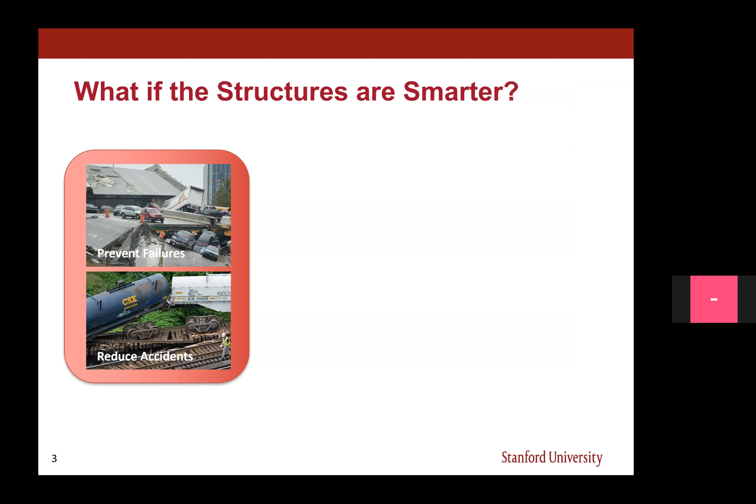So we have to think, what if these structures become smarter? By making the structure smarter, we can sense different kinds of potential failures in the structure to prevent catastrophic events and reduce accidents. So we can increase the safety of these structural systems. But in addition, by better understanding the occupants using these structures or the surrounding environment, we can provide better services like personalized care, enhanced health care for people, or security systems, or better preserve the environment around these infrastructure systems.

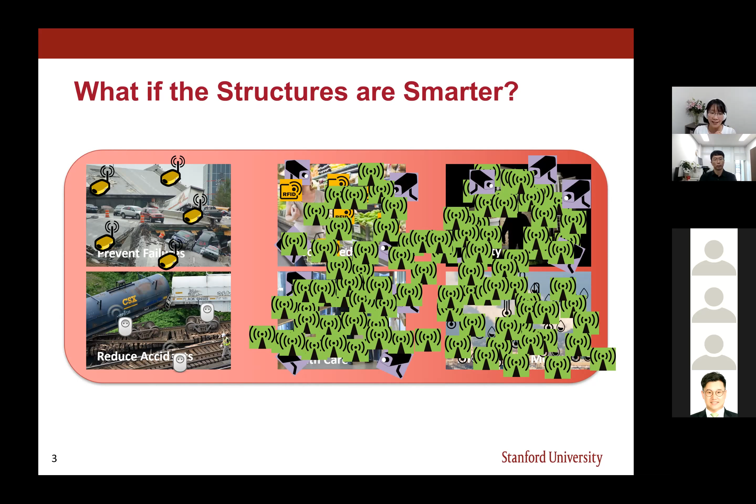So to make these structures smarter, one thing we need is the sensors to collect information about this infrastructure and people. Right? So we can put sensors on the infrastructures, or we can put cameras around to watch people, and various occupancy sensors and so on. So you see, this is what we need. Just need to have a lot of sensors to collect information. But then this sensing in the infrastructure system is actually not a very easy task. There are several reasons for it.

One thing is these structures tend to be very large in scale and also very complex. So in order to instrument all these large scale structures, the system gets pretty expensive. Another thing is the sensor life tends to be short. It's a relative thing. So do you guys know what's the typical sensor lifetime?

Anyone? So an easy example would be, think about how often you change your cell phone. Maybe 2 years. Or if you are better at maintaining your phones, maybe 5 years. But I wouldn't put more than 10 years. So that's the scale for sensors.

Then think about the infrastructures, the buildings and bridges that we're designing. They're designed to last for at least 50 years or 100 years. Sometimes they're standing out there for thousands of years. So there's a huge gap between the lifespan of these sensors and the infrastructure systems, meaning we will probably need frequent updating of the systems and the software and so on. So that will make the system even more expensive.

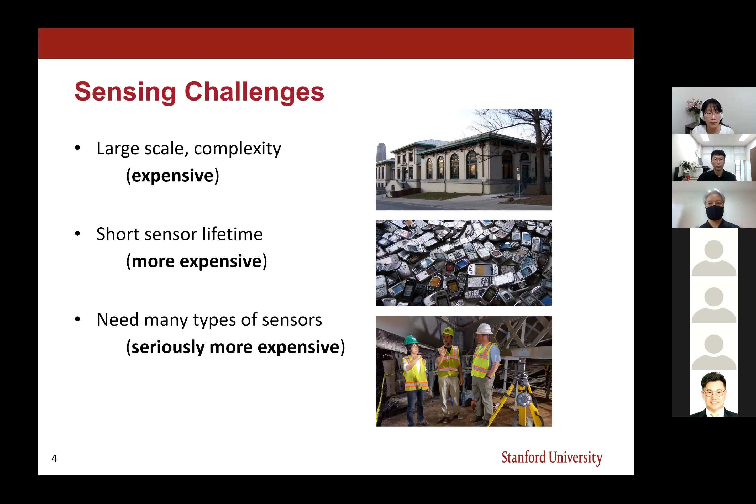And then if you want to do more complex analysis of people and environment and structure together, we need many different types of sensors, which will make the system even more expensive. So in this regard, my research group has been focusing on answering the research question of how can we sense all these things in a more maintainable and sustainable way? And as an answer to that, we proposed the idea called structures as sensors. So what it means is, let me give you an example.

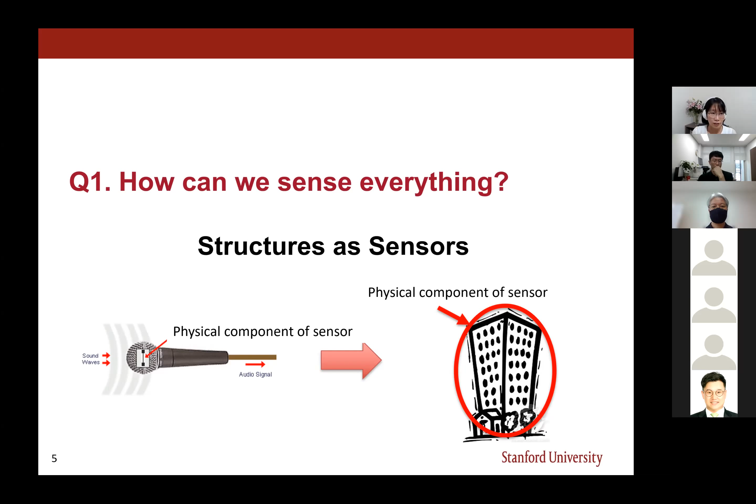So typically, if you think of sensors, the physical component of a sensor, for example in a microphone, is considered a small diaphragm inside the microphone that vibrates as the sound wave comes in. So it's responding to the input, therefore it generates the data that correspond to the incoming sound wave. But now, instead of thinking of this small diaphragm, we're going to think of this entire building structure as the physical component of the sensor that responds to the input coming from the humans and environment and the structures, so it can collect information about them.

So this idea is based on the insight that if you look at these structures, like the transportation systems or the buildings, their structural responses, like their vibrations, depend on the structural conditions themselves, like whether they're intact or if there's any damage to it. That all gets reflected in how these structures move. But they're also sensitive to any activities ongoing for the occupants that are using these structures. And also, of course, they're affected by the surrounding environmental conditions.

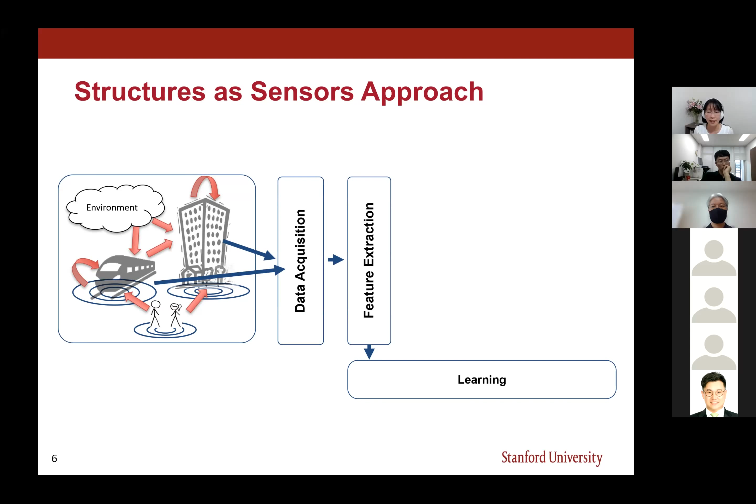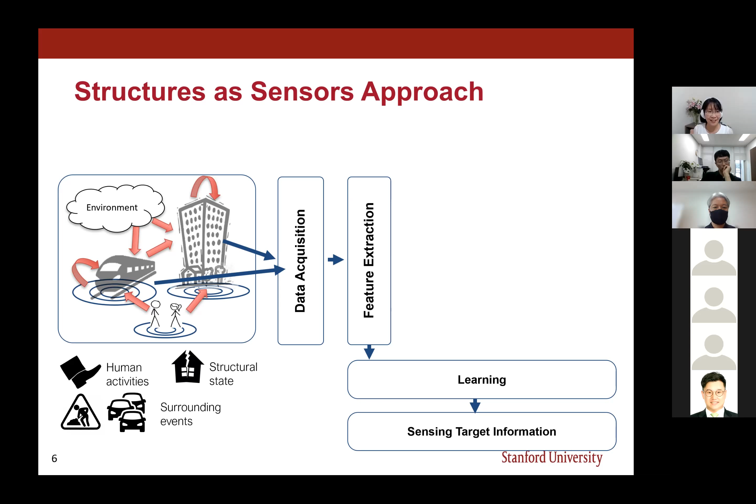So by looking at how these structures respond to all this input information, we can acquire the data from it and then extract useful features out of it, put it into the learning models, and then we can extract information about the sensing targets like human activities, structural damage, and many surrounding events around the structures. So looks like problem solved. We can use these humongous sensors to collect all this information in an easier way.

But then we found out that in order to enable this structures as sensors approach, we actually need a lot of data. That's because, as I just explained, structural responses have all this information about humans, structures and environment, which is awesome. But in order to extract the desired information that you need, you actually need to decompose all of these. All the other information that you don't need is going to become the noise, and you only want to extract the target information you want. So in order to do that, you need a lot of data samples to understand this complex mixture of multiple sources of excitation.

Another reason will be every structure is unique. Think of the buildings. Every building looks different. And even if they are designed the same way, they're constructed differently and they're also used and operated in a different way. So they become different structures over time. So in order to understand these individual structure responses, we need even more data, good data.

And then many of the interesting events that we want to detect or predict tend to happen rarely. Like structural damage, how many times do bridges collapse? A very small amount compared to all the other healthy bridges out there. Same thing, how many people get sick compared to all the healthy people out there. So in order to capture all these rare events, we need seriously more data. Okay, so it looks like we just need to use the structures as sensors approach and just collect a lot of data. Problem solved.

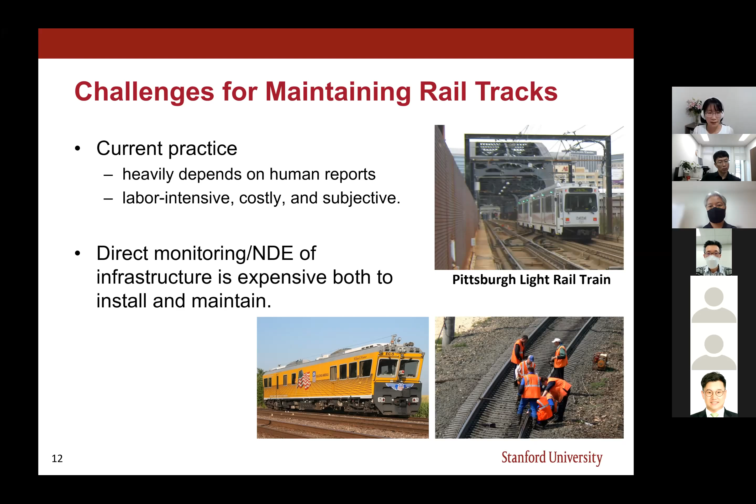So if you think about it, these regular operational trains will travel across the country using these rail tracks every day, or sometimes multiple times a day. So why don't we make these vehicles smarter so we can use them as sensors? So we can diagnose damage on the roads, railways, or railway bridges using only the onboard sensing system in these operational vehicles. So as these instrumented vehicles are traveling across the rail network, it's continuously collecting the information and sending it to the classification system.

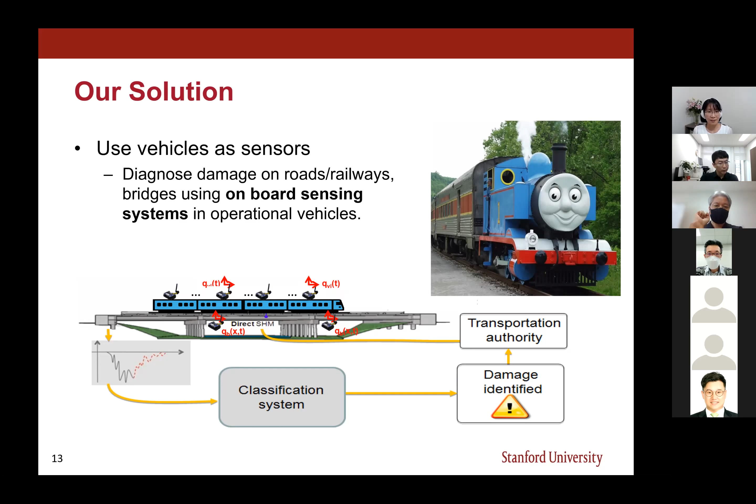And if any anomalies are detected or any defects are detected, the information can be sent to the transportation authority, who can send out more people to further inspect it and repair if necessary. Okay. So looks like problem solved. However, there's never free lunch. So we identified several interesting research questions.

So the major thing is these train vibrations, the train responses we're sensing depend on the infrastructure conditions, like the track roughness that we want to sense, as well as the other things like the operational conditions, how fast is the driver running the train, or the train properties, the mass and stiffness. Like if you think about the rush hour versus quiet hours, the number of passengers will change, which will change the mass of the train.

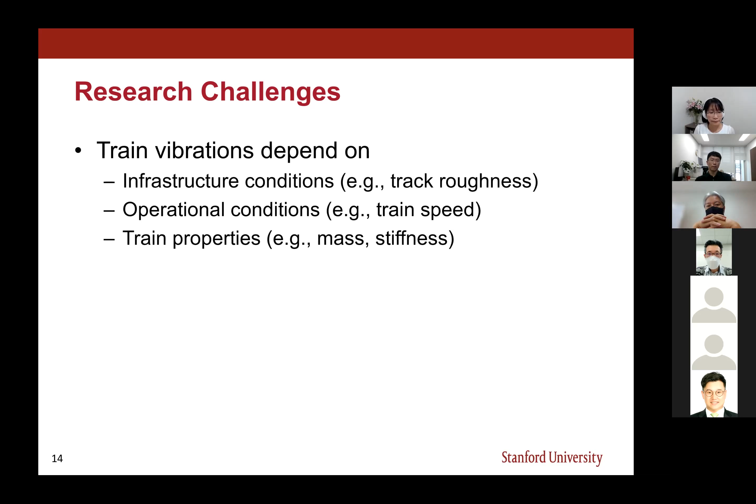And also the suspension system may wear out over time, so that would change the stiffness of the trains. So all these factors we have to consider, and if we're trying to model all these variations and trying to analyze the data, it's almost impossible.

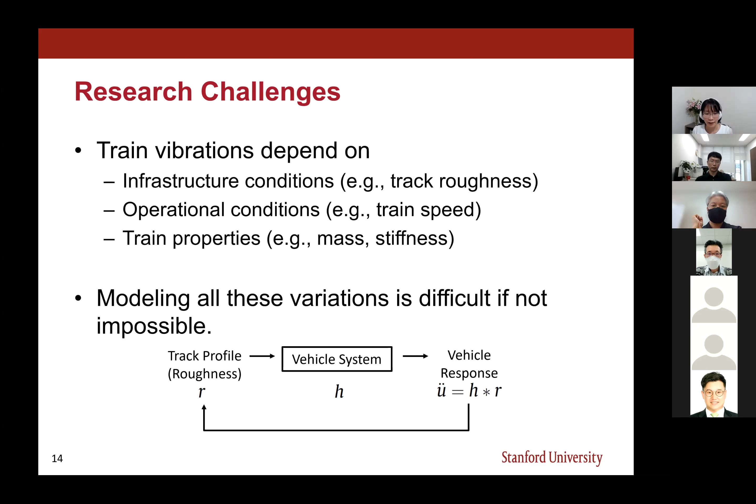I have a very simplified version of the model down here, so we can use the track profile or track status as the input, which is put into the system, which is the vehicle dynamic system. And the output is the vehicle response, which is a combination of the track profile and the vehicle system. And what we want to do is, the track profiles are unknown, vehicle systems are unknown, and we want to infer these unknowns based on the sensed data, the vehicle response. But since there are too many unknowns, it's a highly ill-posed inverse problem. So we need to introduce more constraints to it.

So I made several observations to address this issue. The first one was the train suspension is mostly activated by a few major bumps that naturally exist in the rail system, like joints and switch gears. Also, the unnatural bumps, like the defects that we want to detect. So based on this observation, we can impose signal sparsity in the track profile we're going to infer.

And the next observation we made is that the train's fundamental mode tends to dominate the overall dynamic response that we've been collecting. So we can simplify the train dynamics model in our overall modeling. So from this, we actually simplified it down to a single degree of freedom system to represent the train dynamics. So we put these approximations together to formulate the problem to estimate the track profile or track damage state.

And it became a whole optimization problem. I won't go into the details of the mathematics here due to the time limitations, but basically what we're trying to do is minimize the discrepancy between the train response, the measurement U, and our model prediction, H times R represented here, subject to a couple of constraints that I mentioned above. And solving this also doesn't have a closed form solution, so we had to develop another iterative machine learning algorithm in order to infer the track profile out of this optimization method.

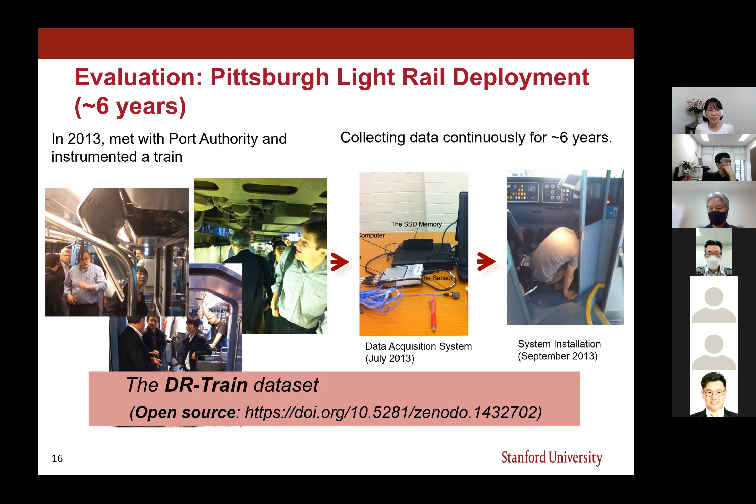And if any of you are interested, we actually open sourced the data set. You can use this DOI and the link to download the data if you're interested in taking a look at the data or developing your own methods. Just to show you the scale of the deployment, this is the 2x9 kilometer Google map with the train trajectory on top of it.

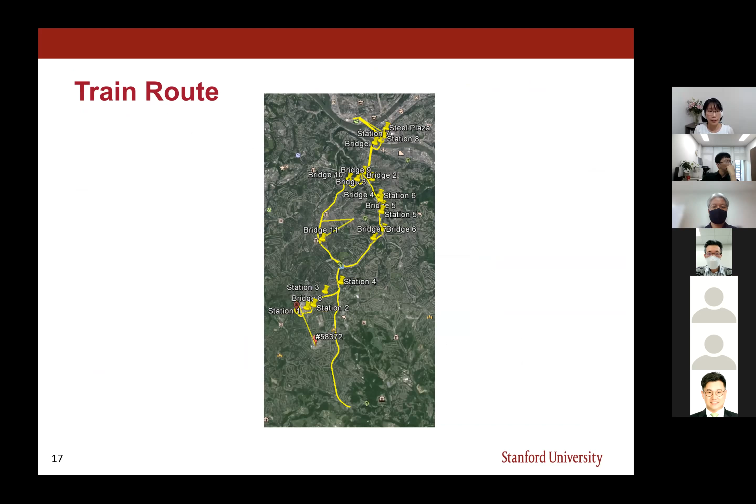So just as a summary, we were able to extract these track profile features by combining the machine learning algorithm with the physics-based model. And we were able to reduce the feature dimension by 100,000 times and remove most of the noise that exists in the data set. And using these features, we were able to identify the damage with about 92% accuracy.

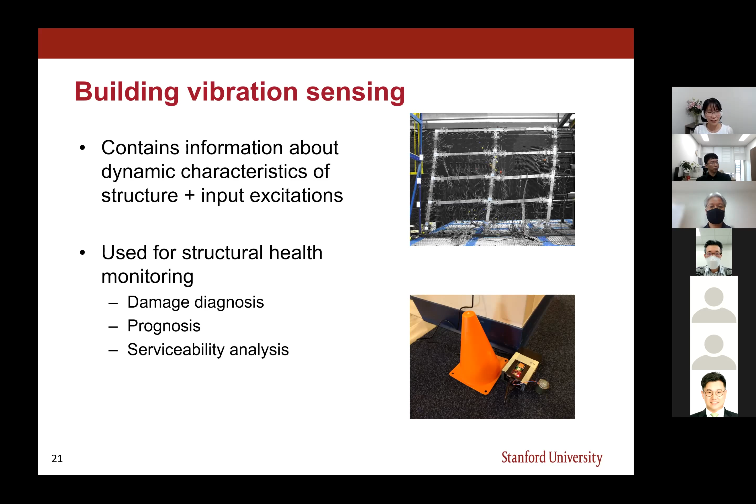Okay. But then we realized that it's not just the structural information that the building vibration contains, but also the human information. So when people have physical activities in the building, their physical motions, for example, the footsteps, create vibration on the floor that will propagate through the whole structure. So building vibrations are caused by human activities, human motions.

So this way we can sense humans through structures, and it actually has various benefits compared to other ways of sensing human activities. There's definitely no need for people to carry a device. So it's non-intrusive with minimal interference to the regular activity of the people. And there's much less perceived privacy concern compared to other sensors like cameras or microphones to track people.

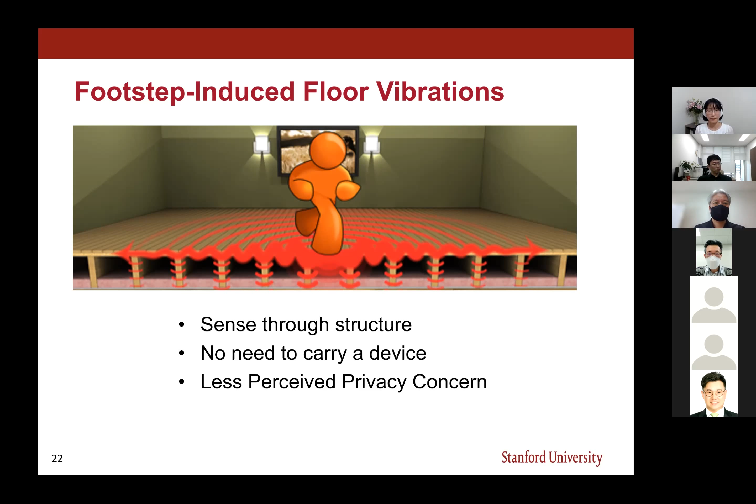So by putting several of these data acquisition systems and geophone sensors on the floor, if the footstep or human activity happens, that's going to create a wave that will propagate and hit the sensors at different times with different waveforms. So by combining these different waveforms together, we can figure out who you are, where you are, what kind of activities you are doing, what your health status is, or even sometimes the cognitive status of some of the occupants.

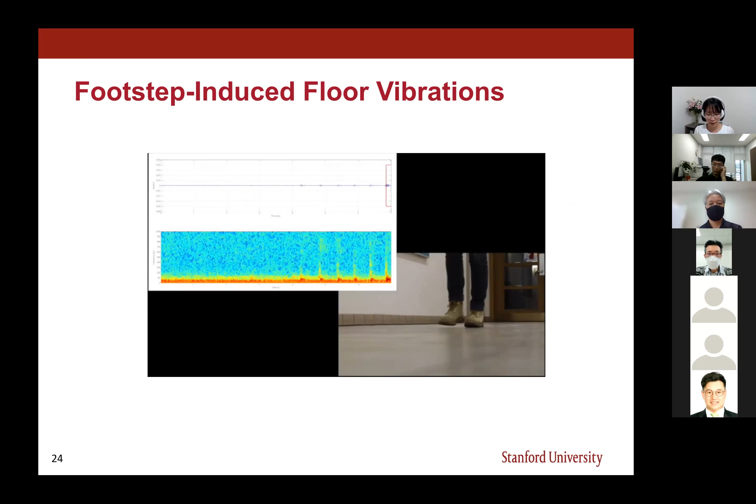So here's a video showing the real-time data collection we've done. The top figure shows the time domain signal. The bottom colorful figure shows the frequency response, the frequency spectrum of the signal. And the red boxes mean our system has detected that signal as a human footstep induced signal.

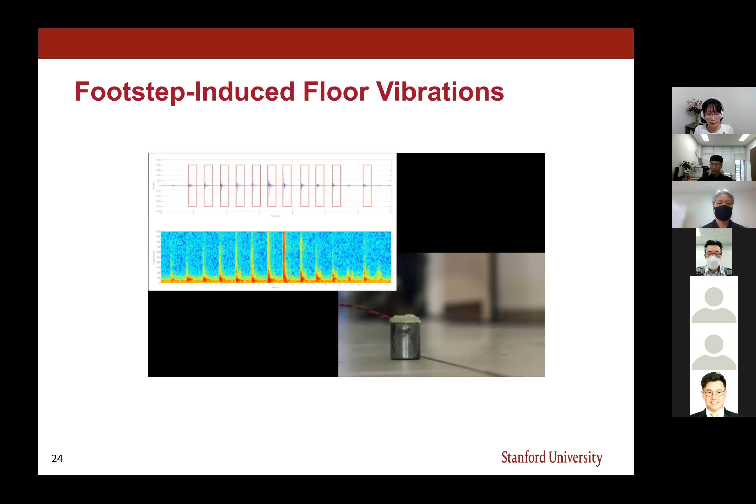So once we detect the footsteps in the signals, recognizing or classifying them as human-induced footsteps versus all the other impulses like door slamming or someone dropping an object is a pretty straightforward classification problem. So we can easily do it with an accuracy of 99.5%. Okay, and once we extract these human-induced signals, there are various characterizations of the occupants we can do.

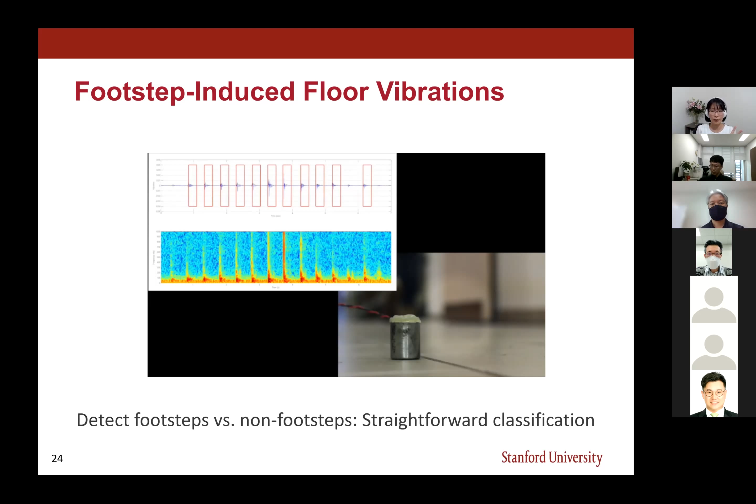So for Carlos, the PhD student, this data was taken just before his graduation. So he's busy with paper deadlines, professors calling him for meetings, so he's always kind of in a hurry. Whereas Ningning was our master's student. When the data was taken, this was after she got her job offer and after the final exam. So she's very relaxed. And also she's a pretty laid back person.

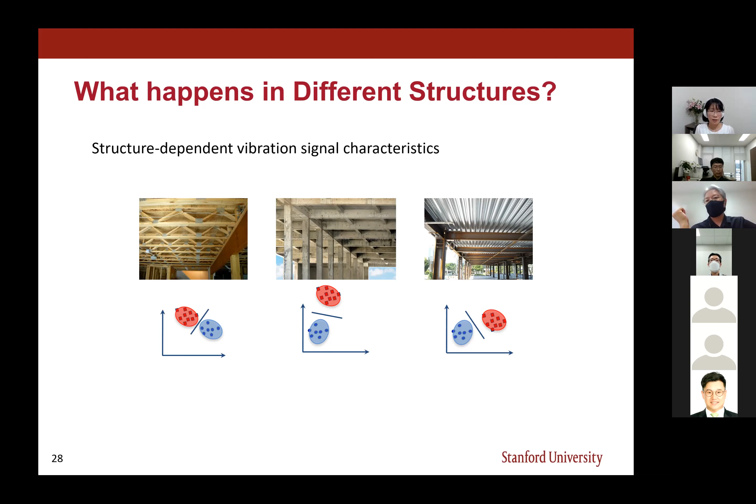We went back and checked whether the detection would work well. Even the detection accuracy went down to 63%, so we can't even tell whether it's a footstep or another kind of impulse accurately anymore. This is a significant drawback in the practicality of the method, because it means we need to calibrate or collect a new training data set in every single structure.

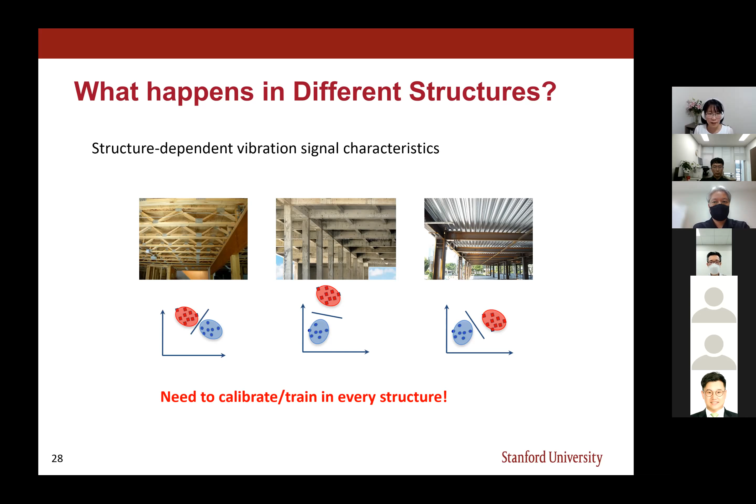So instead of requiring that, we went back and thought about whether we can reduce this data requirement by bringing in more domain knowledge and reformulating our learning algorithm. I'll introduce the new method we developed to address this problem. It's basically trying to transfer the model using the structural properties that we know. Our solution is to extract a smaller set of labeled data from a few reference structures that we call the source domain structures.

Then we transfer the model based on our knowledge about the source structure and the new target structure that we want to test our system on, so that we can still have high accuracy without requiring labeled data collection from these new target structures. The basic idea is, if you collect data from human footsteps versus all other kinds of excitation, you end up with two different data distributions. The difference between them we call the excitation effect, because it's due to different excitation sources. All this data together belongs to the source structure data.

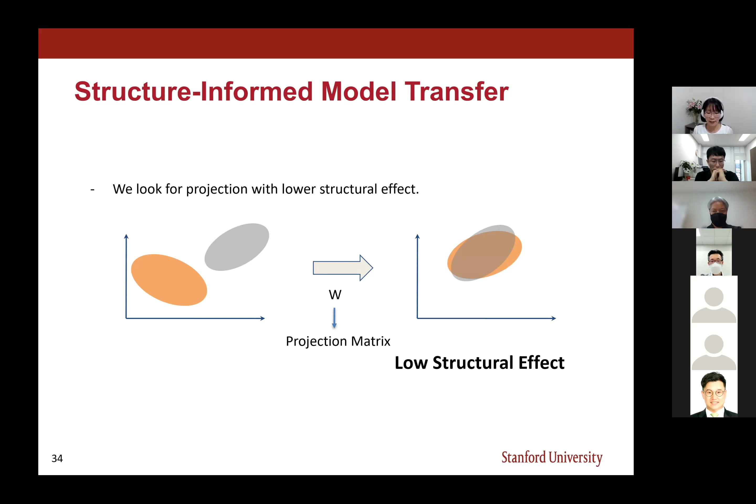So this can be formulated into, again, the optimization problem. I won't go into the details again, but it's basically trying to find the W, the transformation function, that minimizes the structural effect, the distance between the two distributions, also with the regularization term to make it robust to different noise conditions. And we also had a distribution shape preserving term, because without this, the answer is going to converge to a trivial solution: multiply everything by 0, then all the data will overlap.

And then, of course, we have the label information, so that data with different labels, like human versus non-human excitation, are still separable in the new space. Okay. So by solving this optimization problem, we can come up with the transformation matrix W, and then we can transfer the model to the target structure.

So we evaluated this method through 3 different structures. One is the campus building, a non-carpeted concrete slab on grade kind of floor structure. The second one is a nursing home that has a carpeted metal deck floor. And the third one is another nursing home that has a carpeted wooden floor.

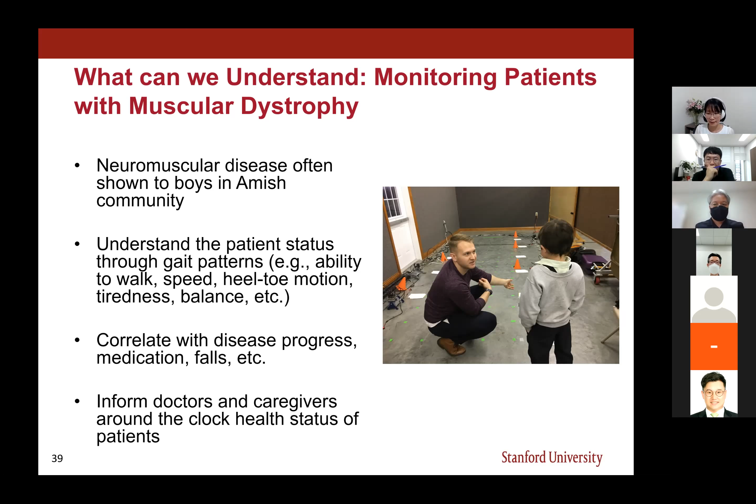If we use purely data-driven signal-based features, that's 83% accuracy. But by combining the physics-based and the data-driven approach together, we were able to achieve 88% accuracy. And then if we remove the structural effect, we were able to get 96% accuracy in terms of detecting the disease. So this is one example of how we can utilize our system in real life.

There are several other real-world projects we have. We've been working with the USDA to do animal monitoring. Apparently, kids are pretty similar to pigs in terms of activity. So we're sensing the ground vibration induced by the animals, in this case the pigs, to figure out what kind of activities they're doing. Do they have any fights? Are they sick? How often are they eating? Are the mother pigs taking good care of the baby piglets and so on? So we correlate those data to animal health.

Another thing is human health. We've been working with elder care centers to do activity monitoring of elderly patients with Alzheimer's or other diseases like Parkinson's. And we're also looking at the fall hazard, because falls can be pretty detrimental for the elderly residents or the patients.

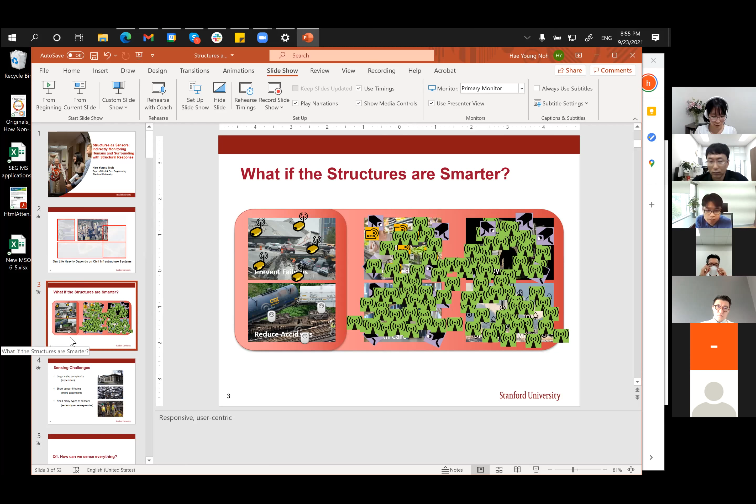Generally, structural properties are affected by temperature change. So even if we apply the same load to the structure, the response may be different in the morning or in the afternoon, depending on the temperature. So how were you able to remove the effect of temperature change for your system identification?

Yeah, that's a very good point. We actually plotted the frequency spectrum and the frequency domain-based features as a function of temperature. Because we have 6 years of data, we got a huge variation of temperature, and it actually showed a linear trend between the feature we extracted and the temperature. So the normalization to some degree was able to mitigate the temperature effect. It didn't completely get rid of it.

Another factor is it was a real rail track system, so we couldn't really induce real damage to the track. What we did was look at the inspection reports. When there was damage, they do the inspection and repair during the summer when there's no snow. So we picked out those damage cases, looked at the signal a month before the damage happened and after the repair was done, and tried to see if we could detect that change.